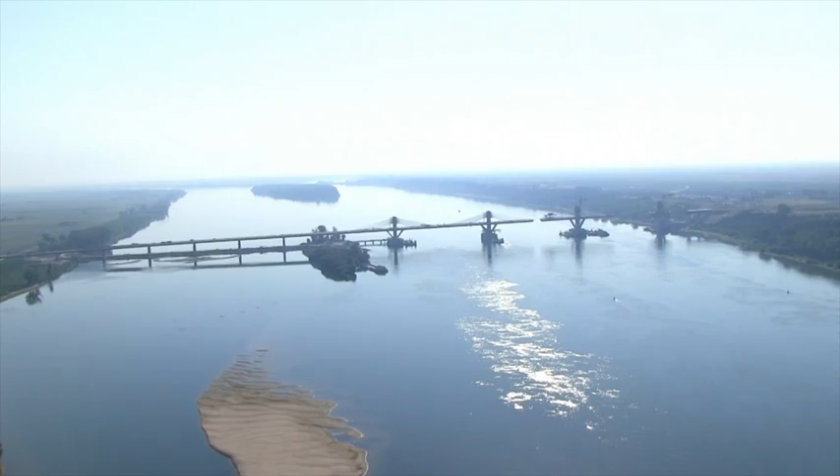In 2006, selected by the Bulgarian Ministry of Transport in an international bid, FCC Construction was awarded the design and construction of the Danube Bridge 2, as well as its accesses including 2 railway stations for passengers and goods. These constructions have been jointly financed by European funds and by the Bulgarian state.

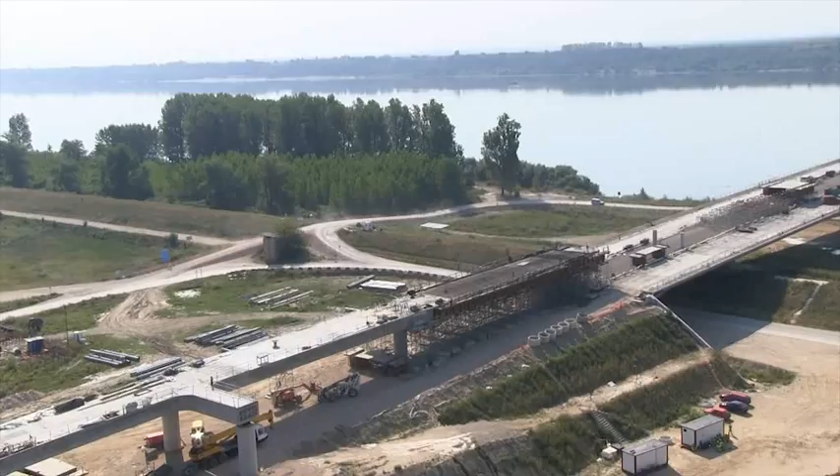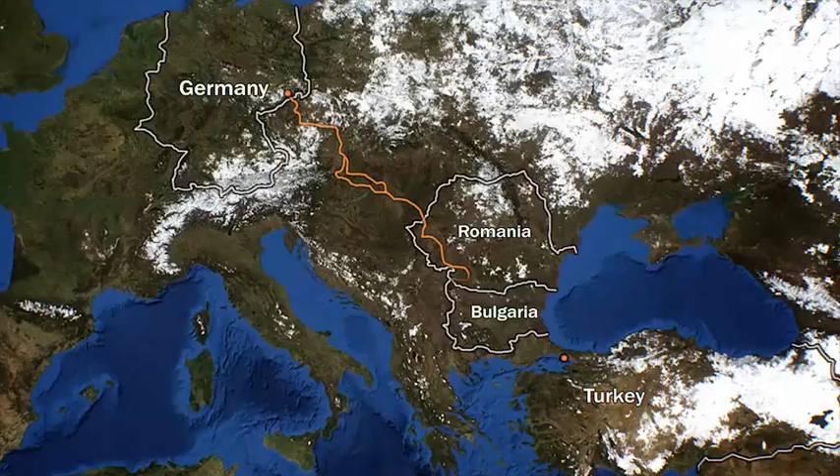The bridge connects the towns of Vidin, Bulgaria, and Calafat, Romania, but its real importance goes far beyond that, as it joins the pan-European transport corridor by road and rail, which goes from Germany to Turkey, besides being the second bridge over the Danube in the more than 650 kilometers of the border between Romania and Bulgaria.

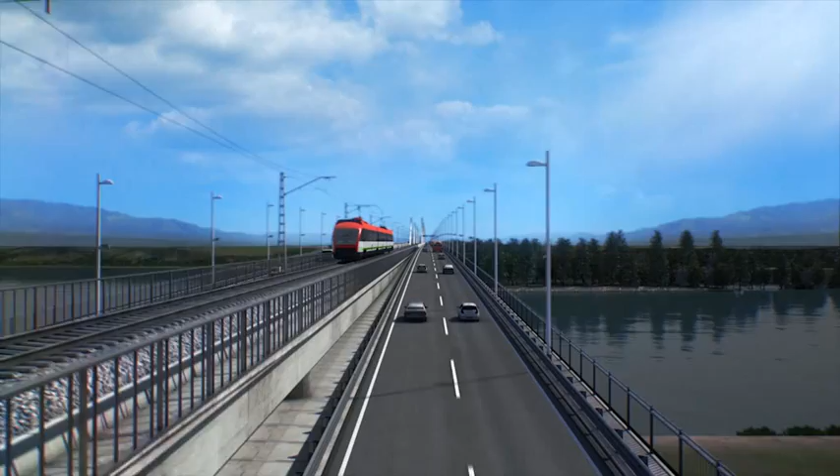The contract was signed in March 2007. The work began in November 2008, finishing the construction at the end of 2012. On the Bulgarian bank, the 4-lane motorway and the railway tracks meet, the latter coming from a higher level. Joined on the bridge crossing into Romania, the road opens in the center for the railway track, and both continue at the same height, first over a non-navigable stretch of the river and after over the navigable channel.

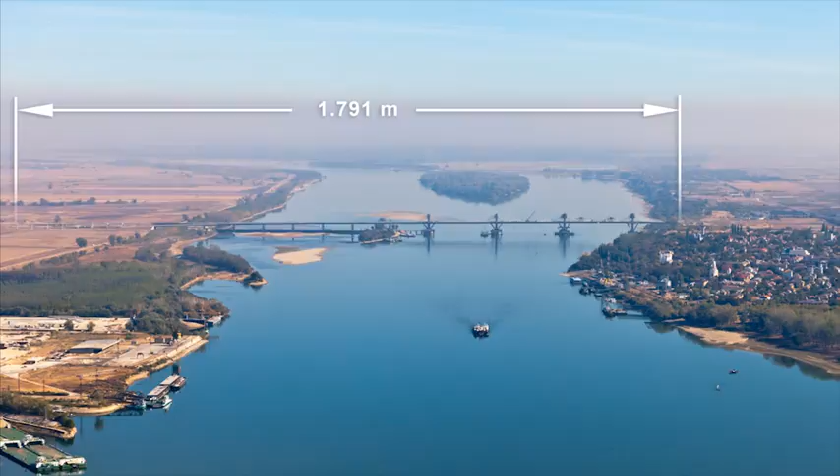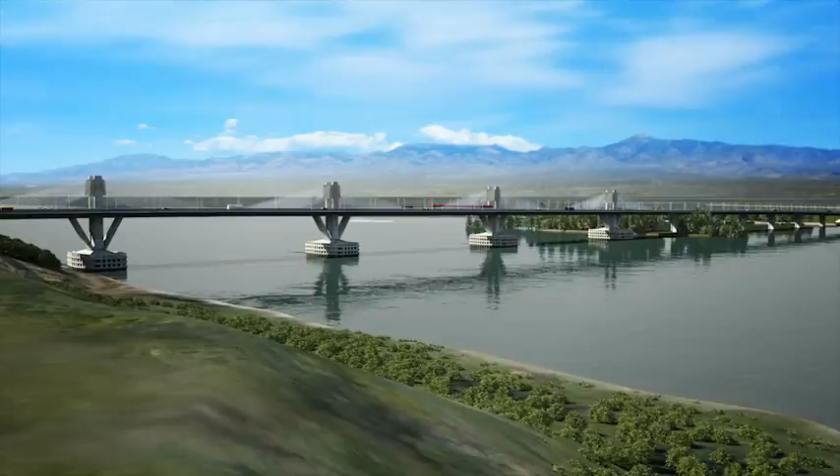The bridge is 1,791 meters long, with a unique unsymmetrical deck with 2 exterior 2-lane roadways totaling 15 meters, 1 central railway platform of 6 meters, 2 pavements and 1 bicycle lane, which make a total of 31,35 meters in width. The motorway is designed for a speed of 100 kilometers per hour with a maximum slope of 4%. For the railway, however, the speed is 160 kilometers per hour and its maximum slope 1,25%. The bridge is divided into 3 distinct parts.

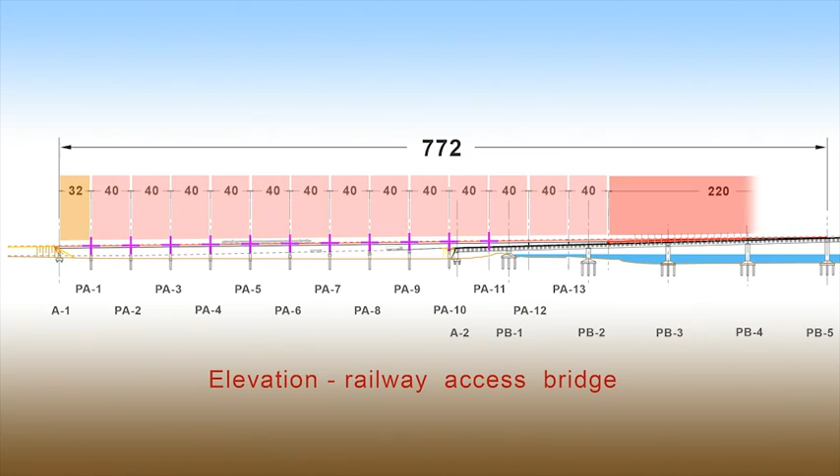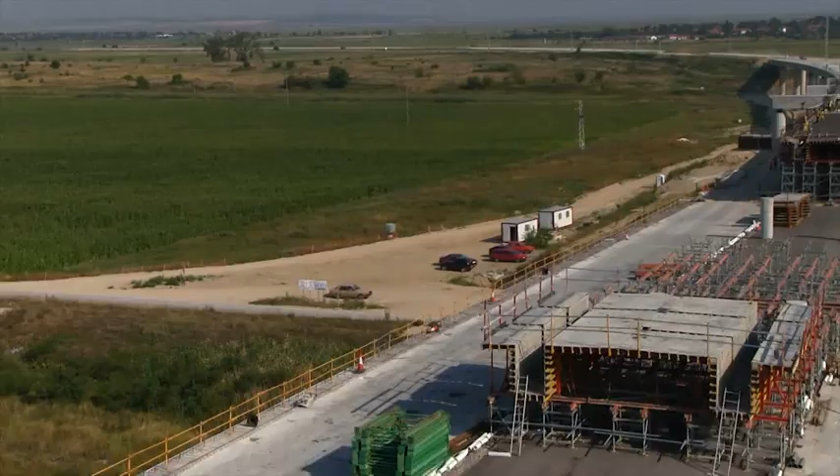The railway access bridge. It's 772 meters long, which comprises a span of 32 meters, 13 spans of 40 meters and 220 meters of transition between the railway structure and that of the bridge over the non-navigable river channel. Built in situ by means of a scaffolding truss, it's composed of a post-tensioning concrete deck with a transversal section in the shape of pi and a platform width of 8,6 meters with a constant thickness of 1,89 meters out of the transition area. The deck is held up by 13 double piers, whose shafts are circular reinforced concrete pile piers of 2 meters in diameter. The length of the piles varies between 35 and 61 meters.

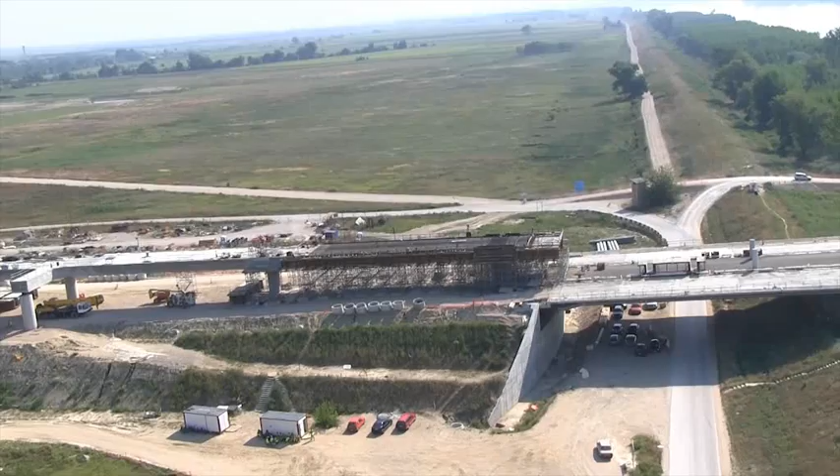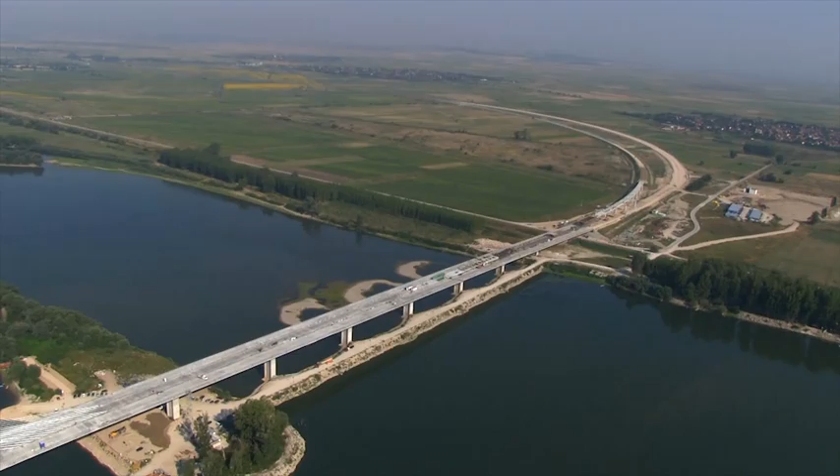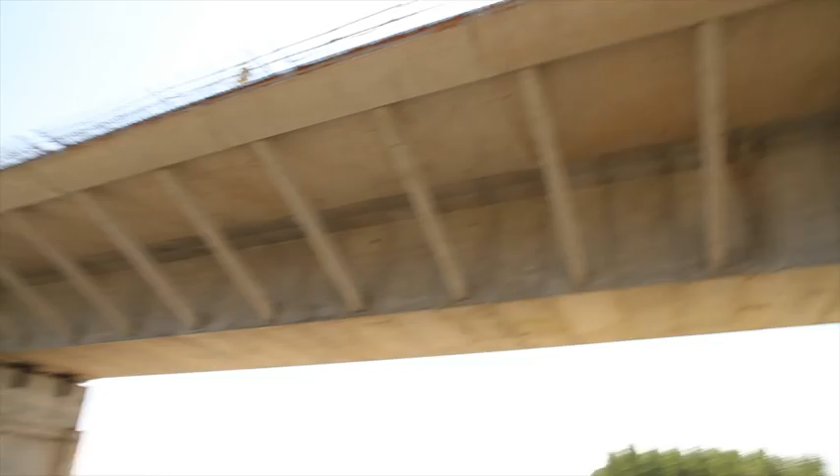The bridge over the Danube in its non-navigable stretch. With a length of 646 meters, its deck is made up of a central caisson comprising precast segments of concrete 2,15 meters long, 4,5 meters thick and 10,9 meters wide, and exterior wings resting on struts every 4,3 meters. Mounted on each pier by the balanced cantilever system, they have a longitudinal pre-stressing within, which connects them, passing through the upper and lower slabs.

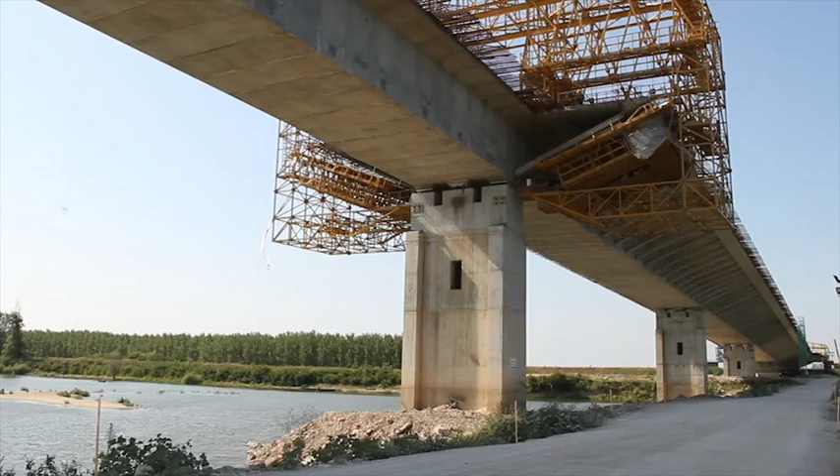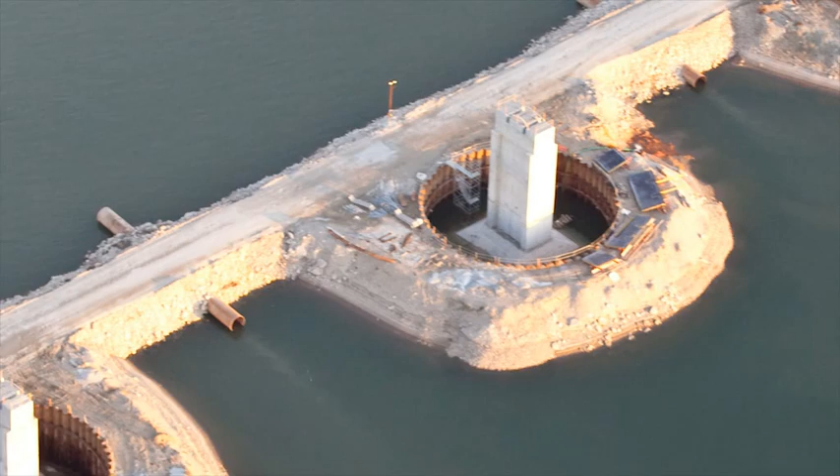The spans are 80 meters long, except for the first, which is 52 meters long. It's supported by 8 concrete piers in box sections and variable height of up to 20 meters, founded in pyramidal pile caps of 15 by 15 by 4 meters and 6 or 7 piles of 2 meters in diameter, with lengths between 55 and 72 meters.

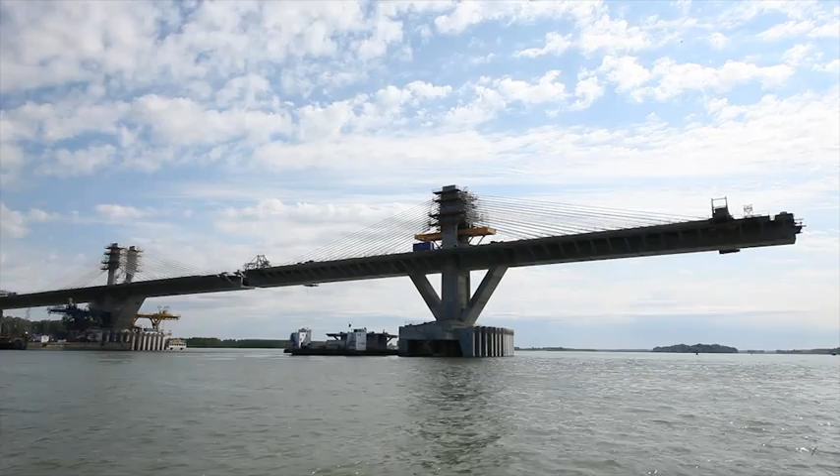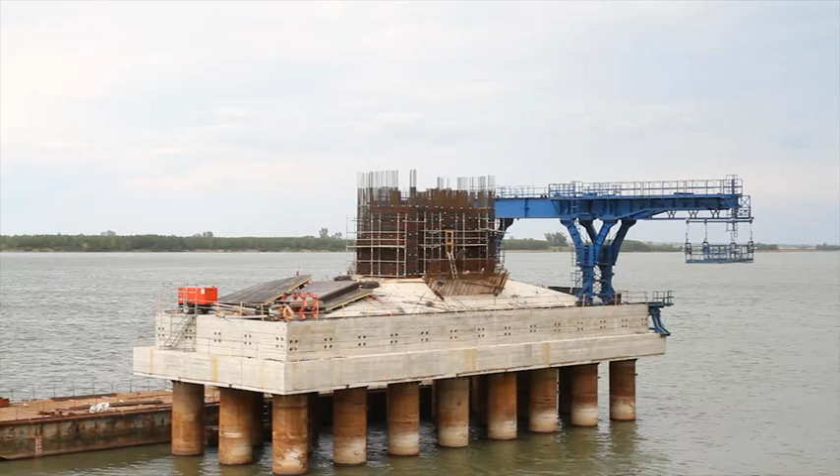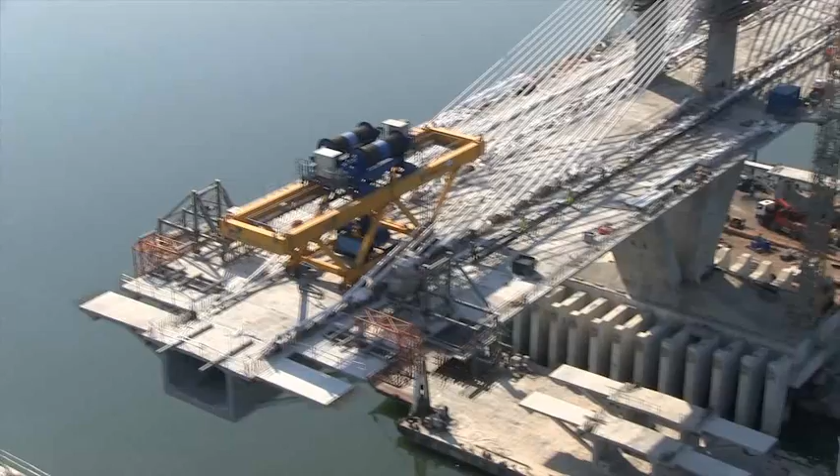The deck is equal to the non-navigable stretch, also mounted on each pier by balanced cantilevers, but from the river and with segments much larger and heavier, 4,18 meters long and 250 tons in weight. Besides the internal longitudinal pre-stressing, due to the greater length of its spans, it requires an extra-dosed pre-stressing which comes from the upper slabs of the segments and is anchored to the pair of pylons 22 meters high in each pier.

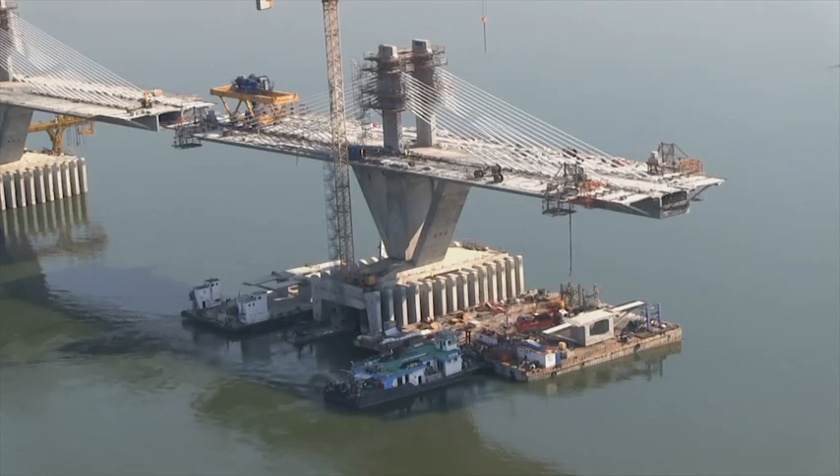The piers have two longitudinal struts which, coming from the pile cap with an inclination over the horizontal of some 55 degrees, hold the deck, being embedded in it and improving the function of the stays of the extra-dosed system. For the protection against the impact of vessels, each pier has 38 precast concrete pieces of between 85 and 135 tons installed, joined to the pier by a pre-stressed grillage, and between them with reinforced concrete tie beams cast in situ.

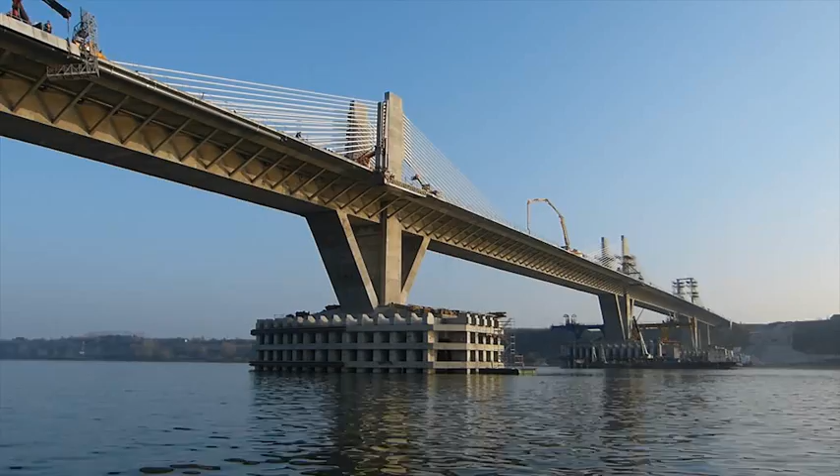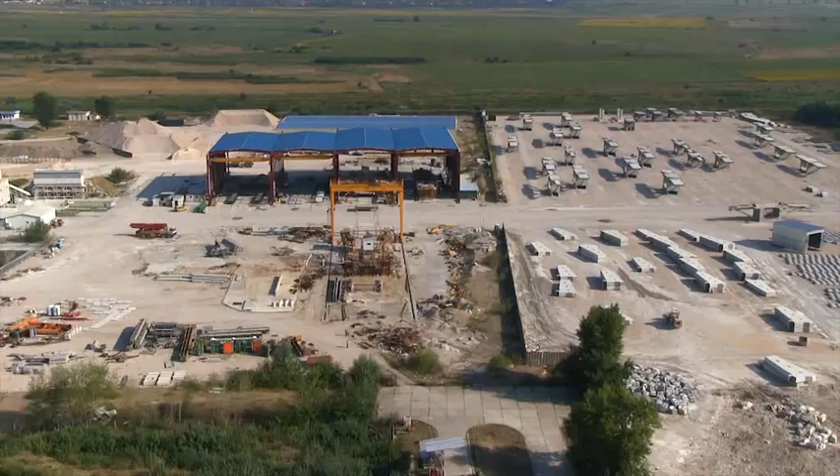To carry out the building works, both for the bridge and the accesses, FCC built a machinery and equipment park 3 kilometers downriver from the bridge, with a total surface of 22 hectares. In it there was available, amongst other things, 5 segment fabrication lines with the necessary infrastructure for the production, distribution and cast-in-place of the concrete, steam curing, steel work base, manipulation and stockpiling of the production.

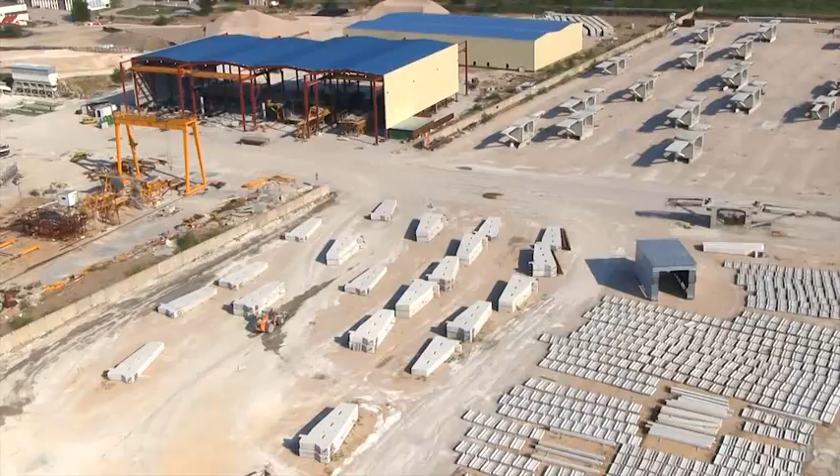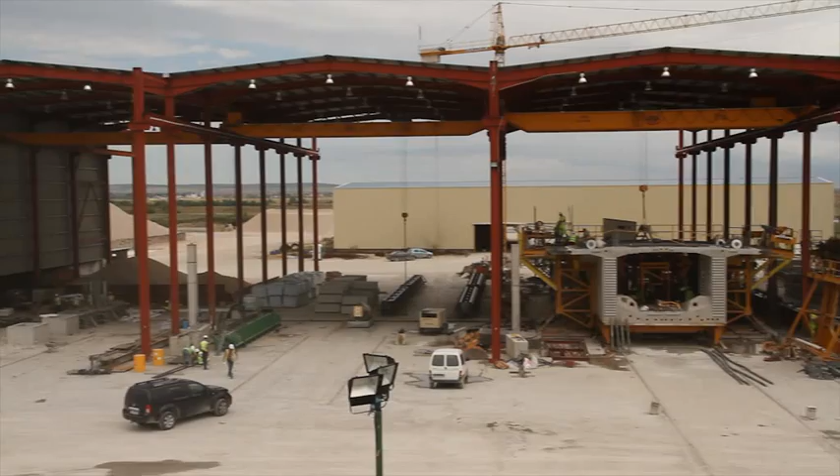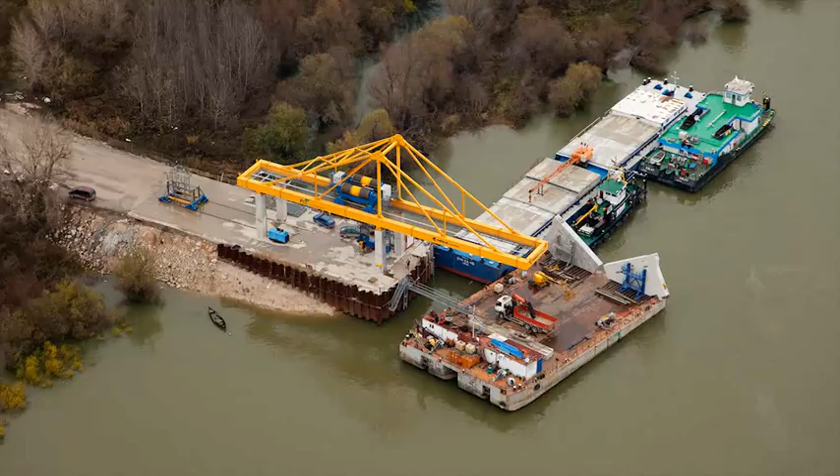There were also 2 prefabrication lines of defences for the pile caps of the piers of the navigable channel, 1 elephant crane of 250 tons capacity, other lines of secondary prefabrication for beams, piles, segment struts, etc., 1 tower crane, 2 concreting plants with a water heating and cooling system, 1 agglomerate plant, covered warehouses, 1 steam plant and another of compressed air, 2 aggregate crushing plants, 15 hectares of storage area and 1 cargo port with access to the river, provided with a gantry crane of 250 tons capacity.

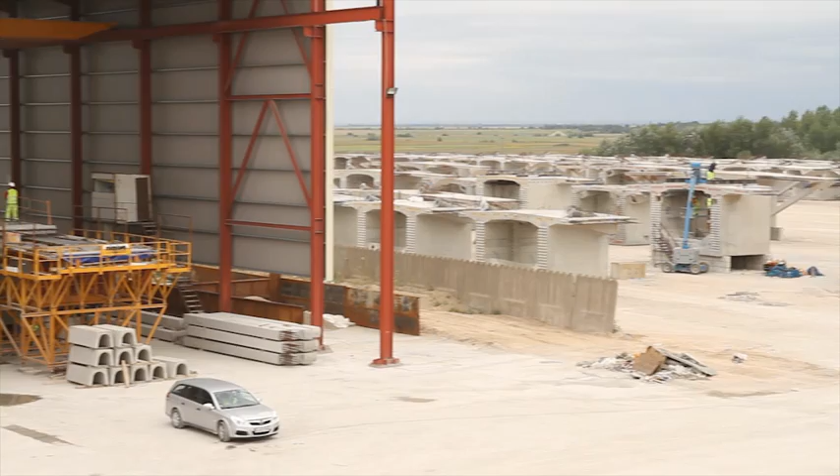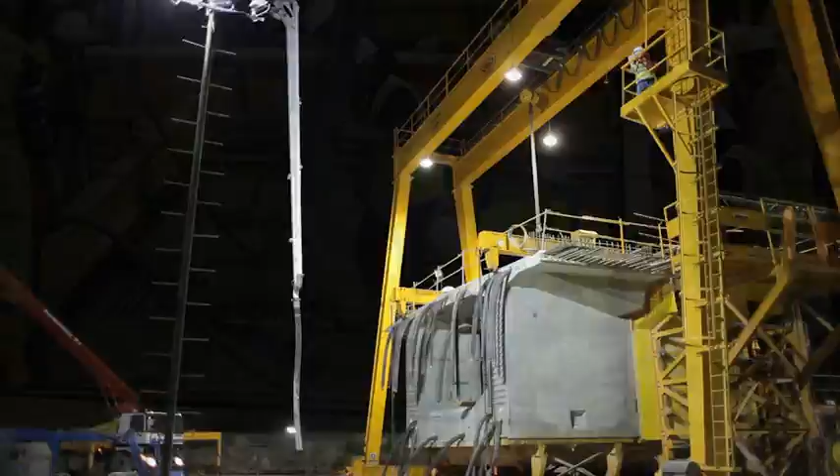The segments have been built by the match-cast segment system, which uses each segment as a formwork for the next one, thus obtaining a perfect join between them. The geometry of each segment is variable in order to adapt the deck to the layout of the motorway. That requires a very rigorous topographic control of production with a tolerance of less than 1/10 of a millimeter. In the segments making, concrete of between 50 and 80 megapascals of resistance has been used, depending on the parts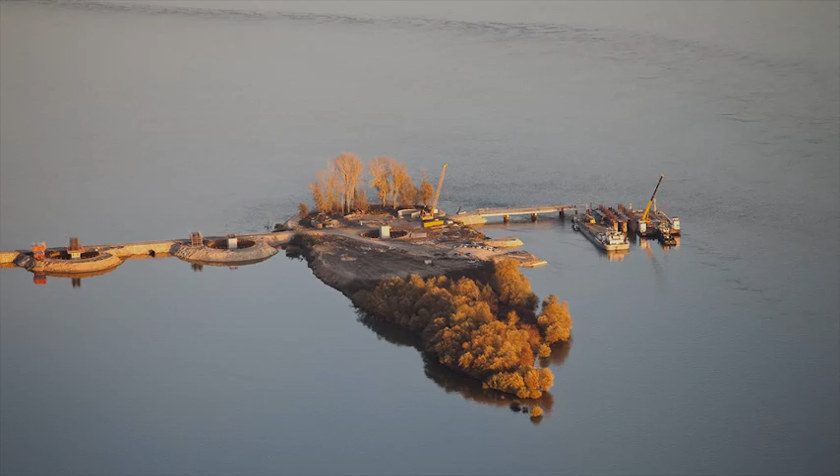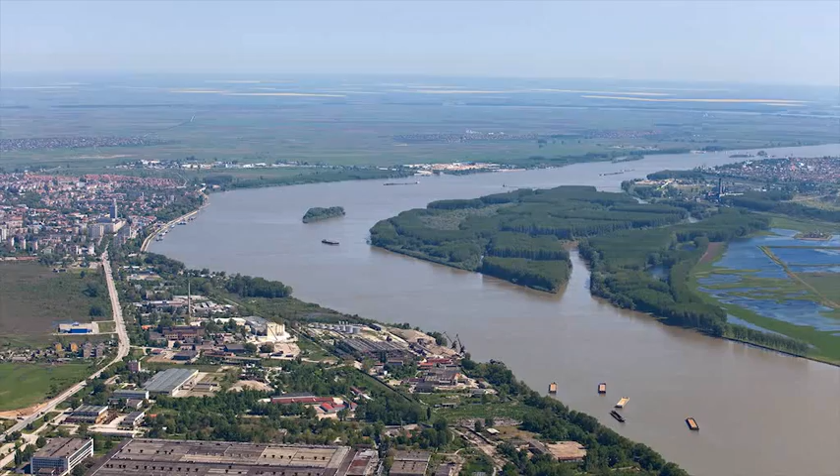of the bridge. The foundation of the bridge over the Danube has been one of the main challenges of the construction, in the design as well as in its execution, due to the lack of full geotechnical information and the difficulty of positioning the piles in the river bed. To that must be added, besides, the great variation of the water level between the low water mark and the higher floods, which could reach up to 11 meters.

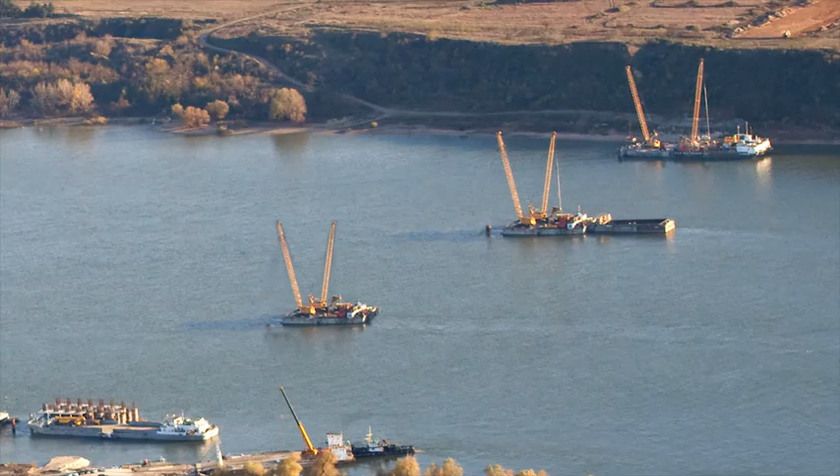For its final design, a detection of explosives or sunken boats was carried out in the area of influence, and another additional geotechnical campaign in the whole length of the bridge, with drillings of up to 100 meters depth in site of each of the piers of the navigable channel. The piles were drilled using bentonite muds and with permanent steel casing of 12 millimeter thickness, with a variable length of between 12 and 35 meters.

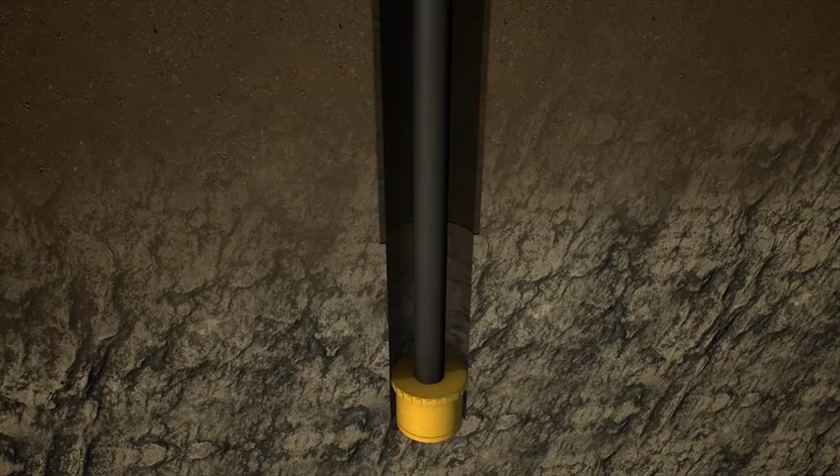Once the excavation was finished, the recirculation and cleaning of the bentonite by means of an airlift system was begun, a process which lasted between 2 and 3 hours, depending on the length of the piles. Later, the reinforcement was introduced in 12-meter sections, joined by welding, and a final airlift before concreting.

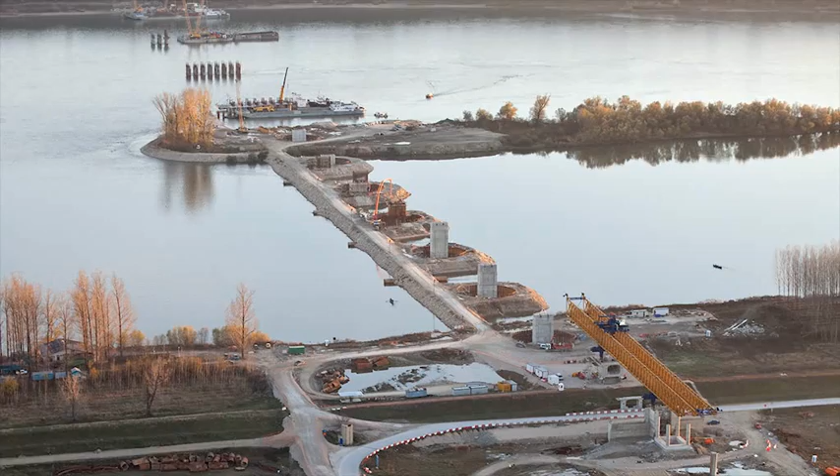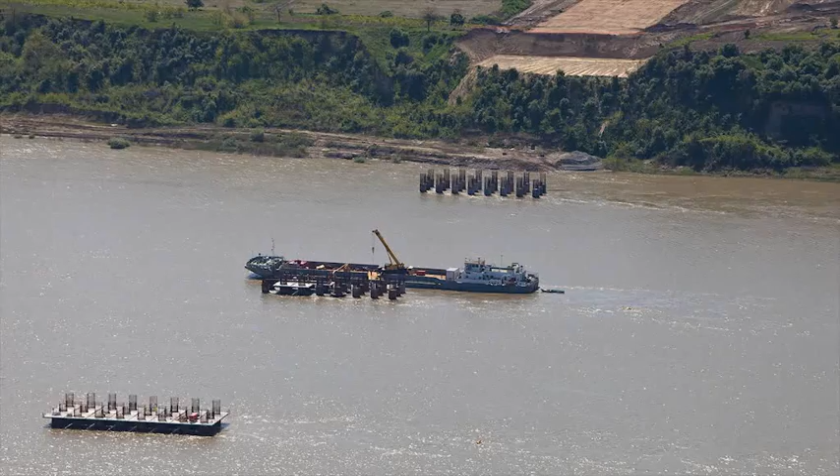The foundation of the piers of the non-navigable channel was made from the shelter of a circular enclosure of sheet piles of 25 meters in diameter. For that, a peninsula was previously built with an access road to all the piers. The piles in the navigable channel, which are the deepest ones, up to 80 meters, were carried out with teams on pontoons, which made it very difficult for the maneuvering performance as well as the on-site layout.

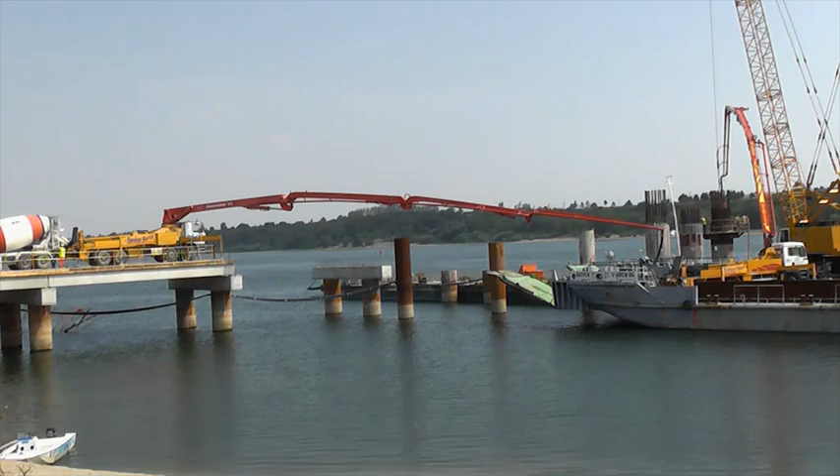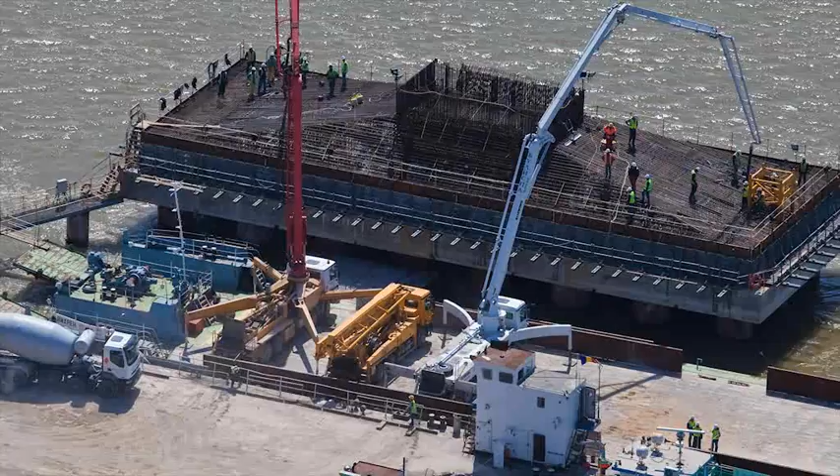One of the great achievements of this stage was developing concrete formulas with 450 kilos of cement and a workability of 3 to 4 hours, with the purpose of arriving in optimum conditions to the spill area, and cuts in the piles were avoided. The ones on the non-navigable channel, with a volume of 640 cubic meters of concrete, were carried out in a single concreting. Those of the navigable channel, with a volume of 2,350 cubic meters of concrete, were carried out in 2 phases.

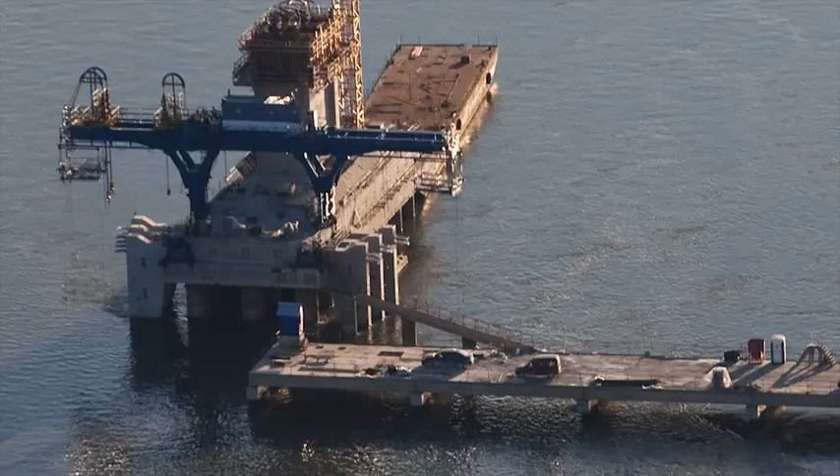These pile caps are longitudinally and transversely pre-stressed for the fixing of the defences against the impact of boats, which were later installed. The defences came from the nearby park of prefabricated items, transported from there by river on pontoons, and they were hoisted with heavy lifting equipment attached to a metallic gantry designed for it.

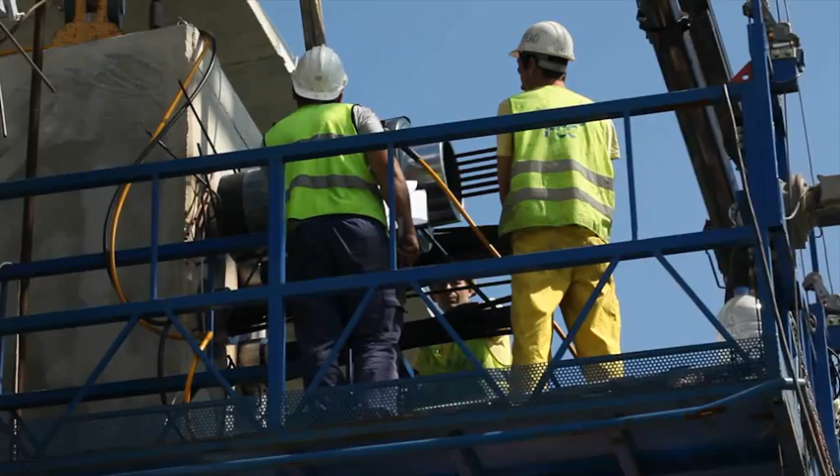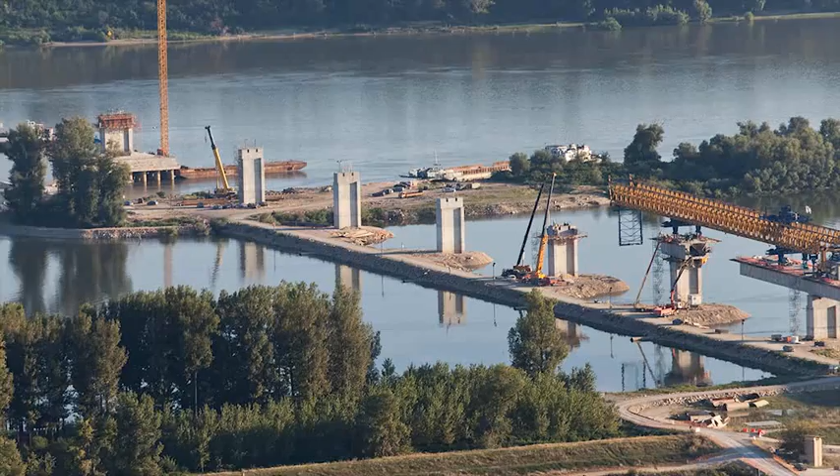Once hoisted, the defence was pre-stressed through the pile cap to fix it in its final position, later bracing all of them with 3 levels of concrete tie beams cast in situ, making the whole system a resistant unit against the impact of boats. The piers of the non-navigable channel are finished in a filled-in head on which the deck is supported by means of spherical supports and a longitudinal guide.

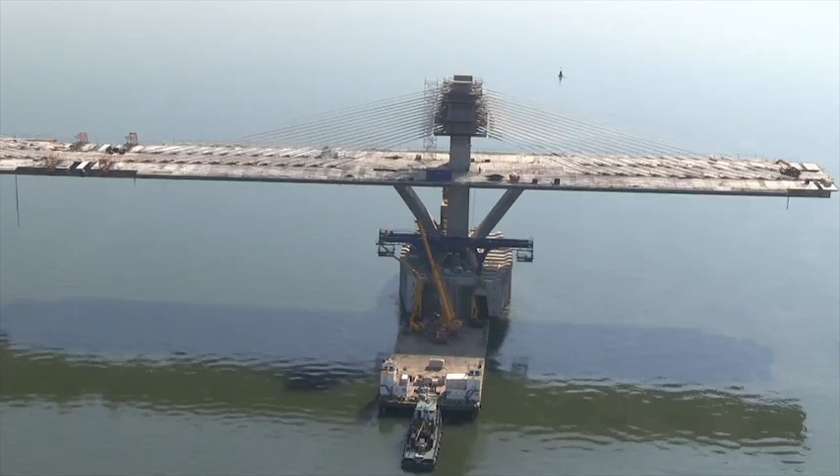In the piers of the navigable channel, however, the deck is embedded in them with a second phase concreting between deck and pier. From the head of the piers of the navigable channel spring 2 massive pylons 22 meters high, of variable geometry and strongly reinforced, where the saddle will be housed, the pre-stressed element which will support the stays of the extradosed system developed by BBR for the construction. The saddle consists of curved galvanized metal ducts placed in the interior of the pylons, which are pre-stressed before anchoring the extradosed stays on them.

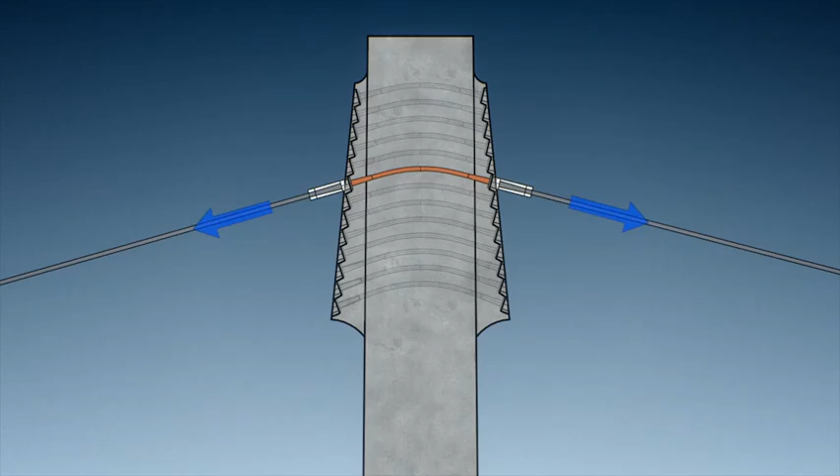What is a novelty and absolutely revolutionary about this system is that, as the tubes are pre-stressed when the extradosed stays pull in the opposite direction, the habitual oscillations of tension in the cables won't be produced, and this is essential in such a difficult element to substitute. The joining of the struts with the deck is carried out by means of a diaphragm concreted in situ, complex for the necessary precision in the mounting of the formwork as well as the steel frameworks, which is full of sleeves. For the execution of the piers, FCC has had 4 tower cranes of 70 meters of boom from its

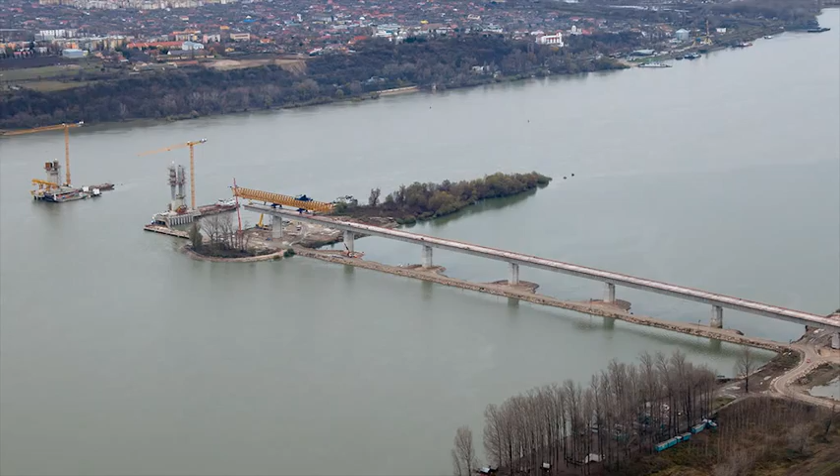machinery park. In the non-navigable channel, the segments arrived by road and were placed on the deck at the end of a launching girder which places them in balanced cantilevers on each pier. 300 units were placed in this way with a maximum weight of 100 tons. The segments were prefabricated with some interior bulks beside the webs, which were used to join each other provisionally with pre-stressed bars. Once the segments corresponding to each pier were placed, the complete stretch was replaced by means of 4 hydraulic jacks housed in the head of the pier. After, each stretch was joined to the previous one, executing a closing segment in situ, and then the definitive internal pre-stressing was carried out.

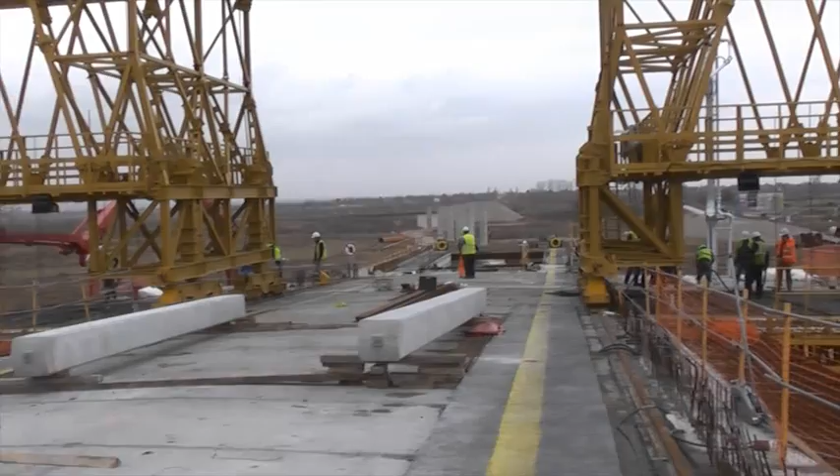The exterior wings of the deck were also executed in situ by means of sliding gantries which were supported on the central caisson. Due to the width of the deck, this was carried out in 2 phases, the first from the central caisson up to the connection of the struts to the deck, and the second from the previous edge up to the deck's extreme.

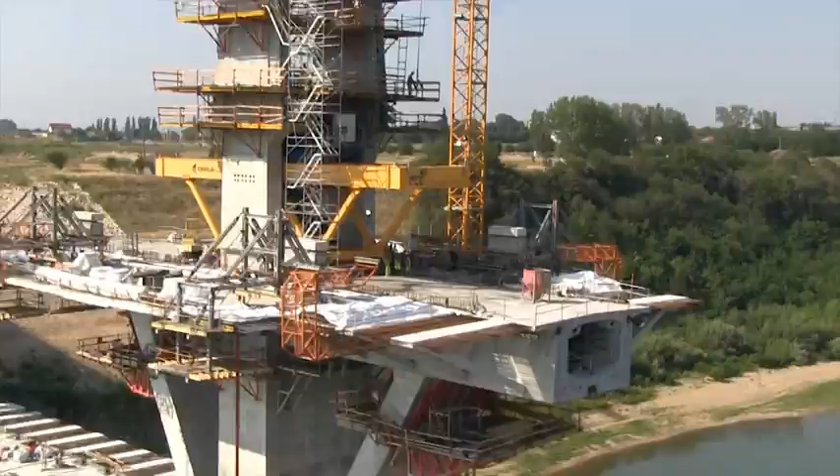In the navigable channel, the realization of the deck needed, due to its singularity and complexity, a great amount of previous work of engineering in the development of the hoisting equipments and the execution procedures, as well as in the development and adaptation of the pre-stressing and extradosed systems. In this case, the segments, which already bring part of the wings from the factory, arrived by river, loaded in a pontoon, and were placed beside the pier.

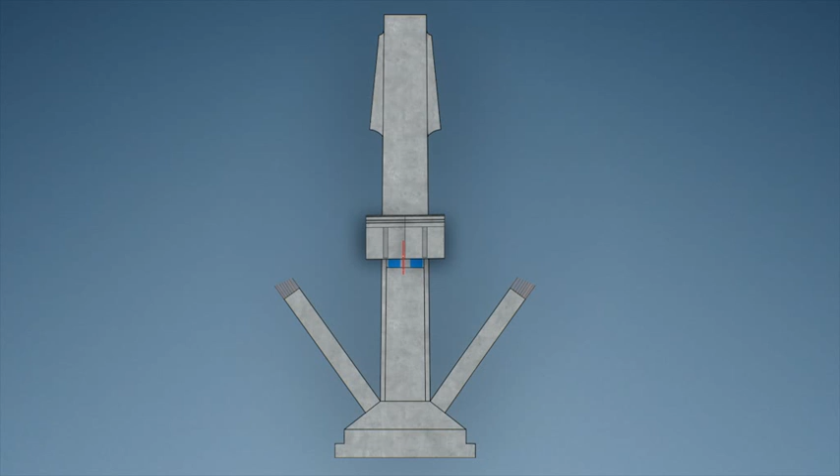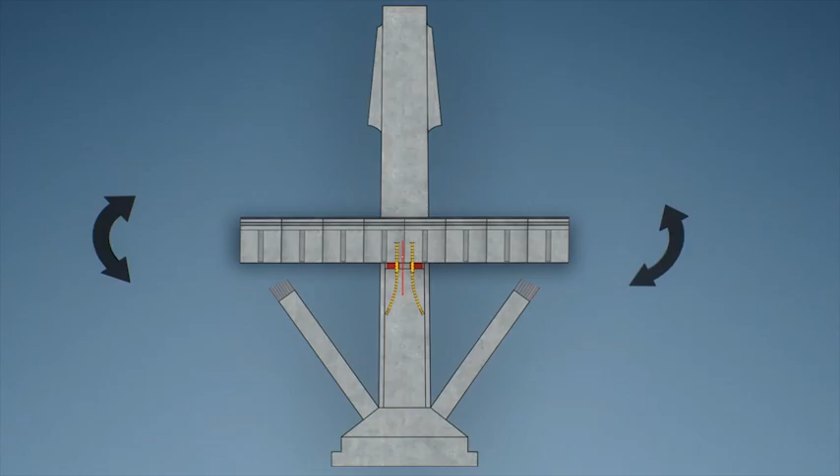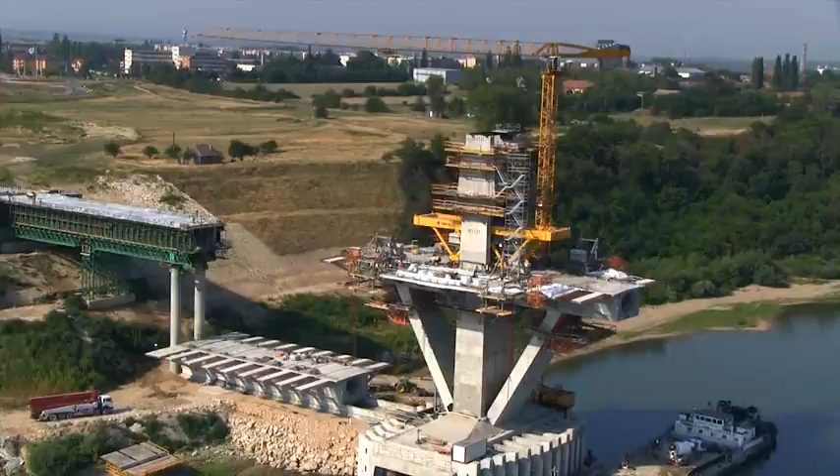Following, a mobile segment hoist crane was mounted which, circulating on the already assembled segments, would be responsible for hoisting the remaining segments of the stretch. The process of hoisting a pair of segments took 16 hours, but the complete installation along with the 4 stays of the extradosed which would go with them took between 3 and 4 days, working 24 hours, depending on the length of the stay and of the number of strands, and consisted in: with the mobile crane fixed to one of the sides, the segment on that side was hoisted.

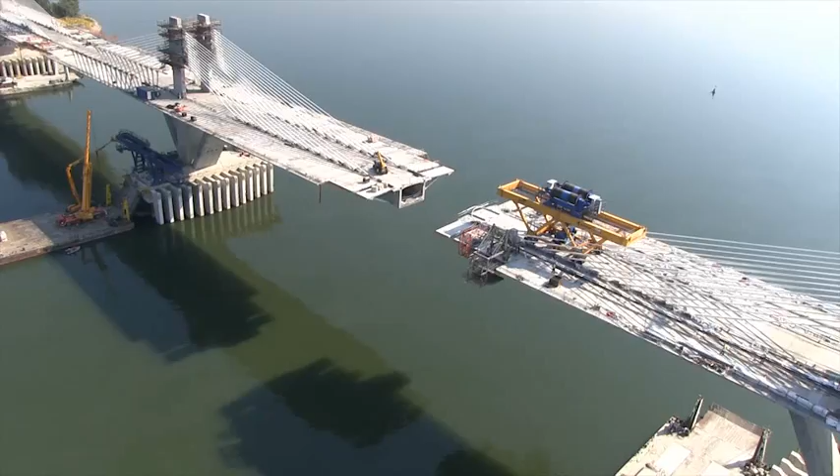A resin was applied to the facing of the previously placed segment, and when both were in contact, they were provisionally joined by means of pre-stressed bars. The mobile crane was moved along the deck and fixed on the other side. The segment of that side was hoisted, joining it to the previous one in the same way. The definitive pre-stressing of the segments was threaded and pre-stressed through the interior of the deck. It was concreted in situ using independent deck wing gantries, which remained from the wings of the previous segments.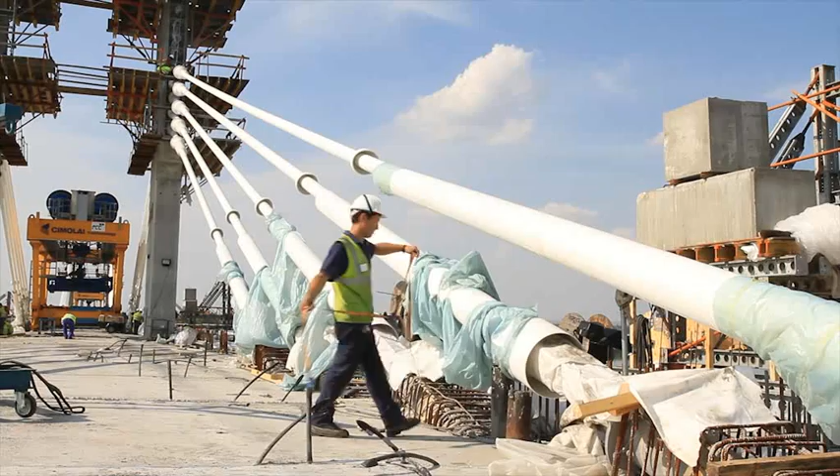From the upper part of the deck, the stays of the extradosed were hoisted, fixing them in the pylon saddle and inserting them into the deck. When the necessary resistance of the concrete was reached, they were pre-stressed with a single strand jack from the upper slab of the anchoring segment.

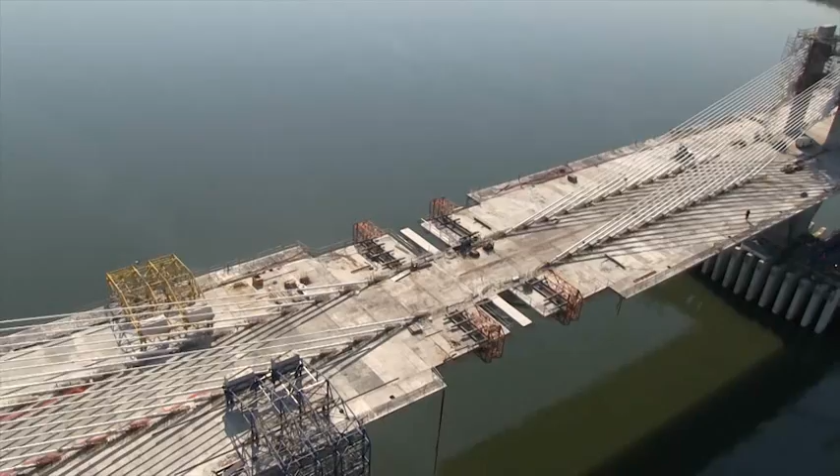Once the installation of the 42 segments of the stretch was finished, its joining with the previous stretch was begun. For that, a prefabricated segment, 3.18 meters long, was suspended from the mobile crane between both stretches, and 2 closing segments of 50 centimeters were executed in situ, in such a way that they fitted perfectly on the closing. After the provisional joining with pre-stressed bars, they were definitively joined to the deck by means of the internal continuity pre-stressing.

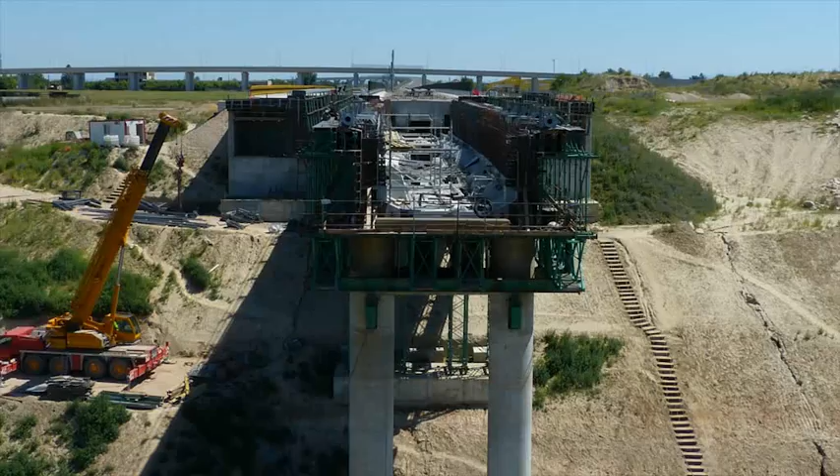In the area near the Romanian bank, the central caisson was executed in situ, supported by a false work bent and 2 provisional piers. This stretch, of 52 meters in length, leant on a system of jacks for its later descent, so that the coupling with the deck of prefabricated segments could take place. The wings of the deck in this area were carried out with sliding gantries on the central caisson.

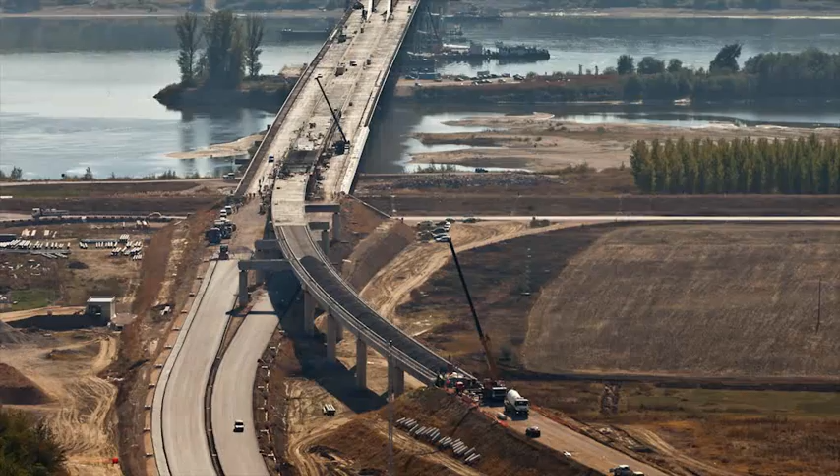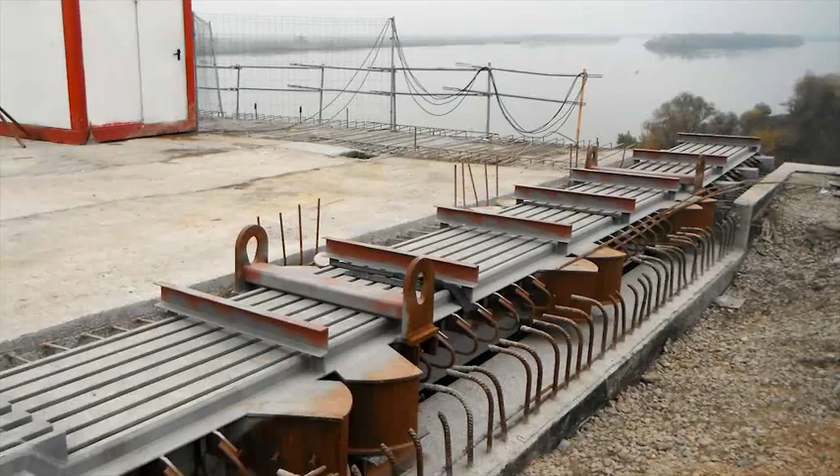Once the deck was completed, the finishing works and the assembly of the installations of the bridge were carried out, as well as the layout of the railroad on ballast, using guard rails in its whole length. One of the most complex elements in the design of the bridge, due to the movements, have been the expansion joints in the abutments, as much those of the road as of the railway tracks, these last being the most difficult due to the parameters required for the circulation of the trains at 160 km per hour. That of the Bulgarian side especially, besides being one of the biggest in the world, has the added complication of being on a bend.

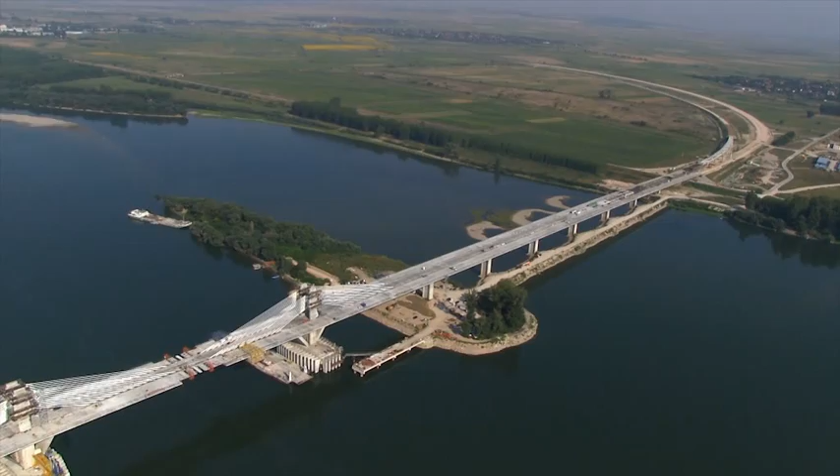With this magnificent bridge for its dimensions as well as for its functionality, strength, quality and aesthetics, which crosses a no less magnificent river and one of the main natural obstacles of Central Europe, FCC Construction has given continuity to a strategic transport route of more than 2,000 kilometers, which goes from Dresden in Germany up to Istanbul in Turkey.

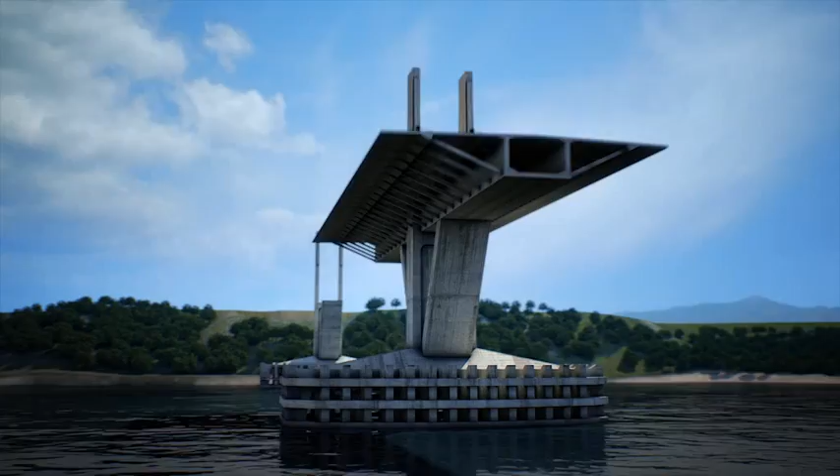The bridge has been executed with FCC Construction's own means in the prefabrication of elements as in the assembly system, which has meant reaching speeds 3 or 4 times faster than conventional methods, besides a completion of great quality, ensuring the security of the workers at all times. It's an impressive work of engineering which has shown once again that FCC Construction can overcome any challenge which presents itself, making life more comfortable for those who have trusted in it, thanks to the preparation and dedication of its construction workforce, as well as the unquestionable quality and permanent support of its technical services.